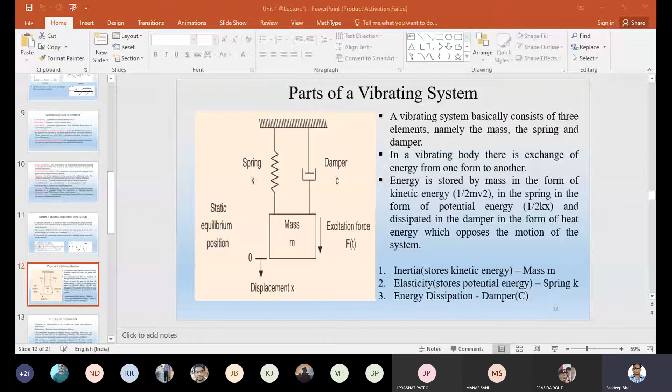Now coming to the next slide, we have effect of vibration. So due to vibrations, what are the different effects or different causes due to vibrations? You can see this vibrations.

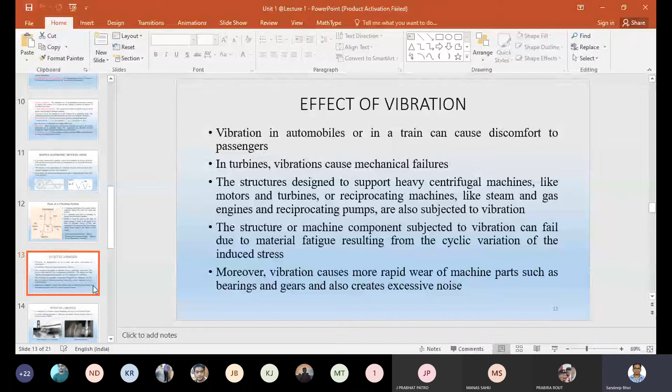First of all, you will see the vibration in automobiles or in a train can cause discomfort to passengers. Most of you have gone through train travel and seen jerking many times; also if you have gone through the bus, many times jerking will be there. That jerking is due to these vibrations, so once you feel the jerk, you get this type of oscillation. Once oscillations will be there, you will have certain vibrations, and you can feel that vibration while traveling in automobiles.

Also, if you see in turbines or heavy machinery, vibration causes mechanical failure. As I have already discussed, in heavy machinery once vibrations arise, many problems will arise. That may be due to loosening of mechanical components or parts. Once the parts, nuts, bolts and all these things get loose, these vibrations will cause further issues.

Once vibration occurs in this kind of heavy machinery, there will be many mechanical failures, and due to this failure lots of losses will be there, which will be very difficult to bear. So we will try to avoid all these vibrations or losses due to vibrations, right?

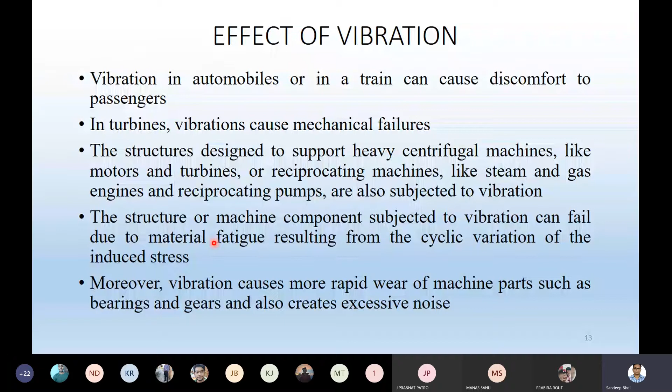As another practical example of how vibration effects occur: suppose this bridge has been designed according to certain criteria, but it fails. It fails somewhere here because it has achieved some external excitation.

That external excitation will be equal to the natural frequency of the vibrating body — as I have told you, once resonance arises, resonance means the external force of excitation becomes equal to the natural frequency. This bridge initially has some natural frequency, and once it achieves that external excitation equal to its natural frequency, resonance arises, and once resonance arises, this bridge will get failed.

That is what we always try to avoid — resonance. So for what purpose are we calculating the natural frequency? It means the natural frequency is the ultimate point beyond which no external frequency should exceed. That external frequency should not achieve the natural frequency of a body. Once it achieves, or becomes equal to or greater than the natural frequency of the body, then this kind of failure will happen.

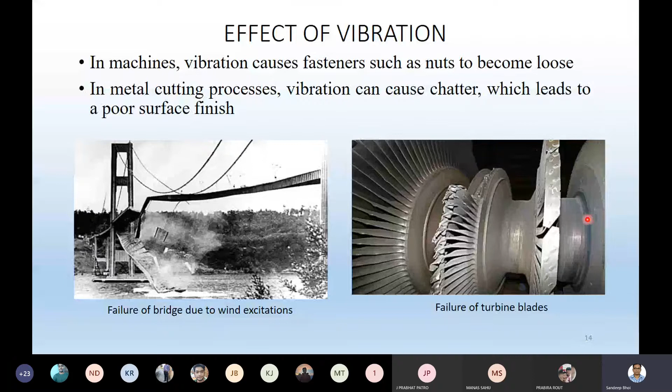Now let us see why to study vibration. As you have already seen, you must always remember, vibration is always an undesirable condition in a mechanical system. We don't want vibration in any kind of system. Just remember, vibration is always undesirable in any mechanical system.

Whenever the natural frequency of vibration of a machine or structure coincides with the frequency of external excitation, resonance occurs, leading to excessive deflection and failures. That is what I always told you. Once resonance arises, excessive deflections will be there, and due to these excessive deflections, failure arises, so we must remove the causes of vibration at the design stage.

So at the design stage, as design engineers, while we are designing these vibrating parts and components, we'll have to remove the different causes of vibration, so that it will be a good design.

For an existing machine or structure, we reduce the effect of vibration by designing proper vibration mitigation strategies such as viscous damper, tuned mass damper, etc. We'll see these things after these slides, what exactly happens in the mechanical system with dampers.

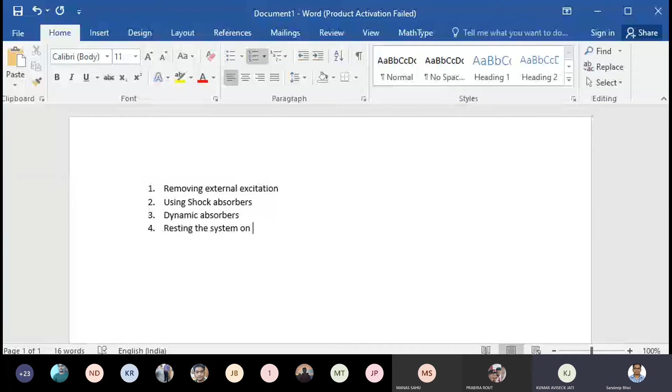First one will be removing external excitation. Second one using shock absorber. Third one using dynamic absorber. Fourth one, we will be resting the system on a proper vibration isolator.

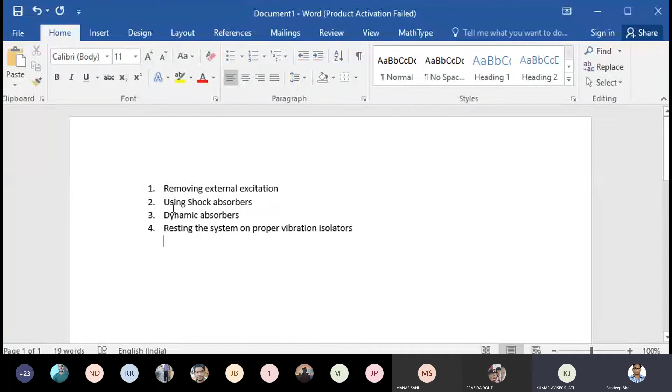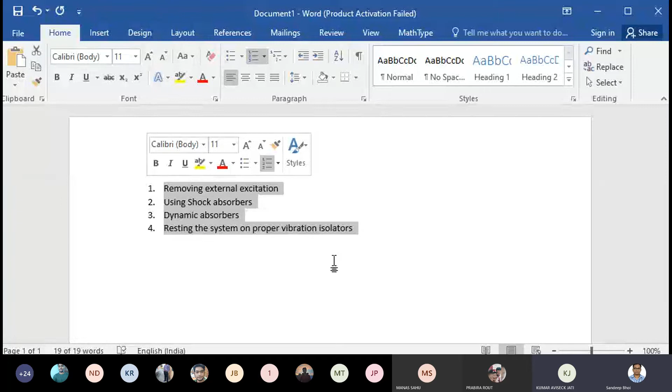So these are the few ways how you can avoid your vibration, or how you can eliminate or reduce the vibration up to a certain extent. So how you can eliminate it or reduce it? First one, either removing external excitation.

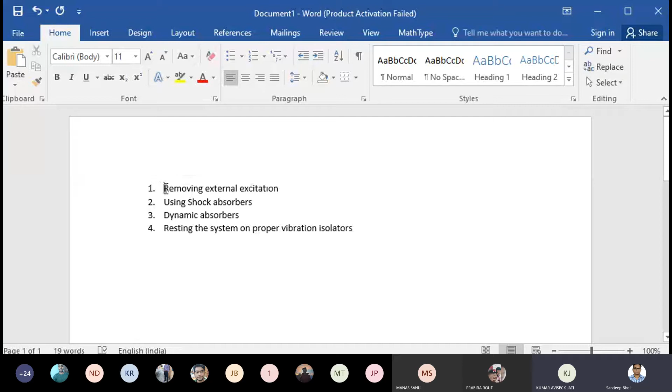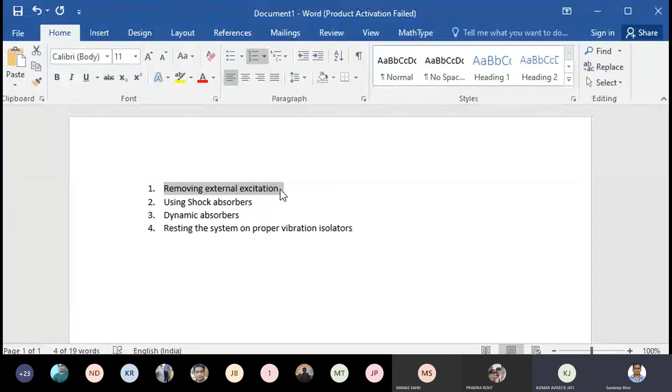I will let you know what is external excitation. External excitation means suppose some external force is applying, and due to that vibrations will arise. So once we remove that external force or external excitation, then your vibration may reduce up to a certain extent. So that is one way of reducing your vibration, by removing external excitation.

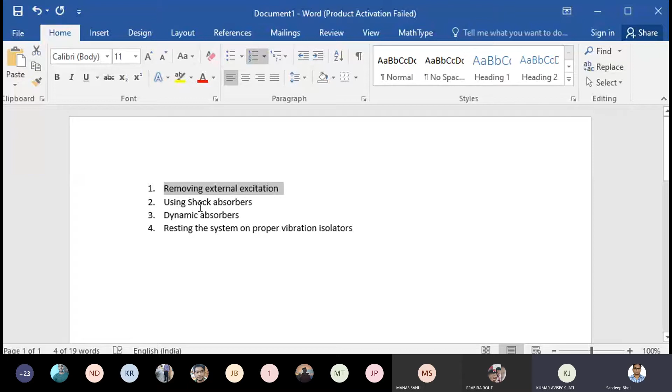Second one will be using shock absorber. In the last class I told you the example of a bike. You have a shock absorber in your bike, right? So using a shock absorber also, you can imagine if your shock absorber is not there and you are passing through a hump, what happens, how do you feel? If in your bike the shock absorber is not there, you can imagine, and that way you can understand the importance of the shock absorber in the role of avoiding vibration.

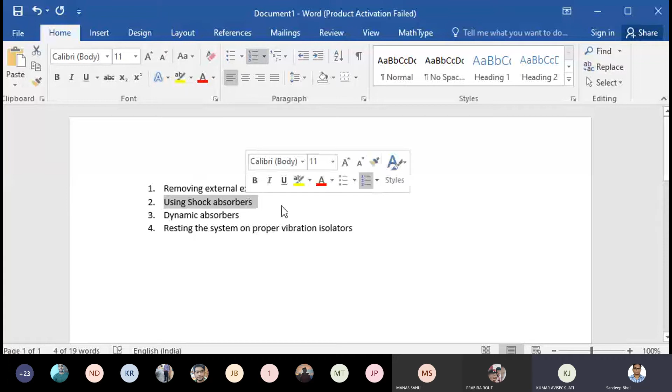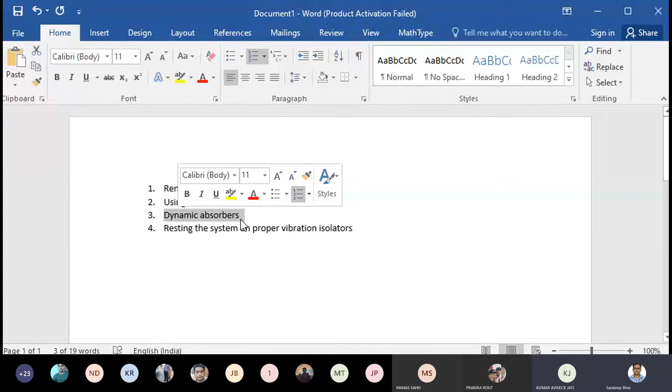In case of dynamic absorber, it is also one kind of damper kind of thing. It can absorb the vibrations, so that the vibrations can be eliminated up to a certain extent.

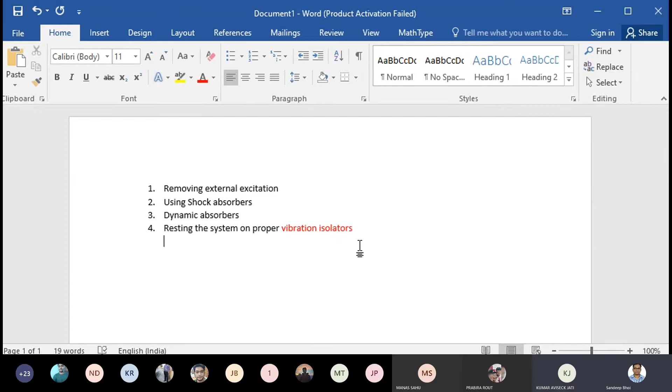Another one will be resting the system on a proper vibration isolator. What does this mean? Vibration isolator means what? I think most of you have seen the UTM machine in your workshop, right? That UTM machine is placed. Can you imagine that UTM machine is placed above a certain concrete foundation? That foundation is called your vibration isolator.

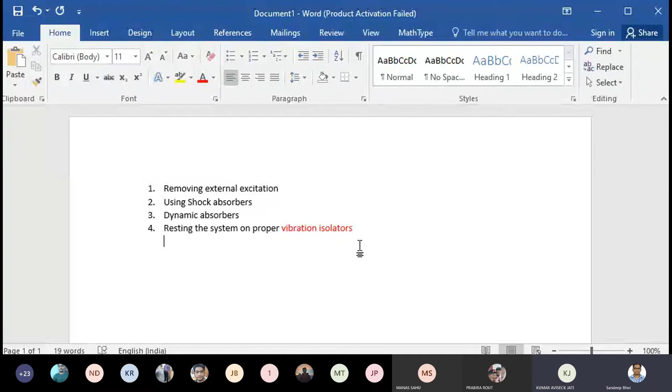So you can imagine, when the machine operates at a certain RPM, that RPM will transmit to the ground. That RPM means vibration. Due to that RPM, when the machine is running, the vibrations will be there in that machine, and through that machine, those vibrations will be directly transmitted to the ground, and the ground will break if we do not provide that foundation. So in order to avoid the direct transmission of vibrations from the machinery to the ground, we are giving some vibration isolator, in the form of concrete or some foundation.

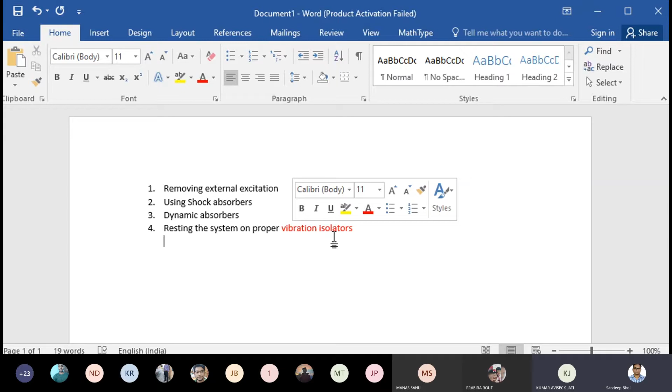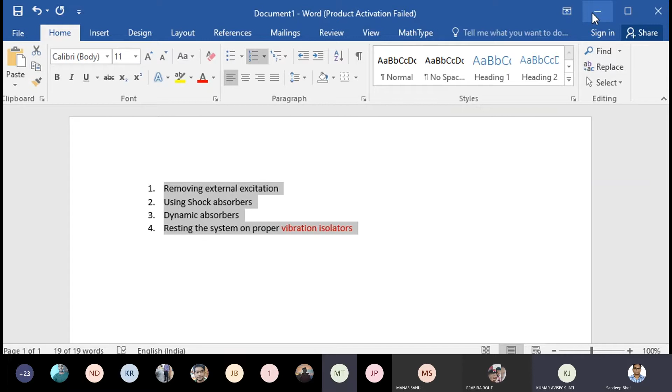So these are the different ways of removing or eliminating the vibrations up to a certain extent. So now we'll see, sir, what is dynamic absorber?

Dynamic absorber, you can imagine, for example, when you are operating the lathe machine. You have seen that the job will be fixed to one side, and you are rotating, at the tail side some rotating device is there, and at the head side your job is fixed. So while you are rotating that machine with a certain RPM, that rotation or deflection should be constant, or else it will vibrate at a very high frequency, and those vibrations you cannot control. So for controlling high speed rotating machinery, you will have to use some dynamic absorber so that it will absorb the vibrations.

Are you getting this or not? Absorber means it will absorb all the rotational movement and all these things.

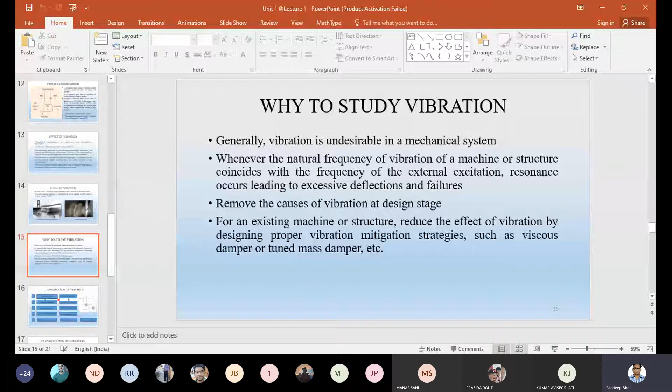I'll just show you, let me tell you one thing, just a minute.

Suppose this is what your lathe machine is all about. One part is here and another part, the tail part, is here, and some chuck is here, and you are giving some tool. Tool is here. So this will obviously rotate with high speed. Once it rotates, because it is connected with some motor, that motor will supply power here and it will rotate. This chuck will rotate. This part is fixed, and this will rotate. It will rotate, and due to that rotation, this may get some vibration. So in order to avoid these vibrations, we need some dynamic absorber, so that it will absorb its deflections. It will not deflect, and it will be in constant rotation.

Hello, your voice is very slow. Now it is okay. Yes sir, actually due to network problem it was slow.

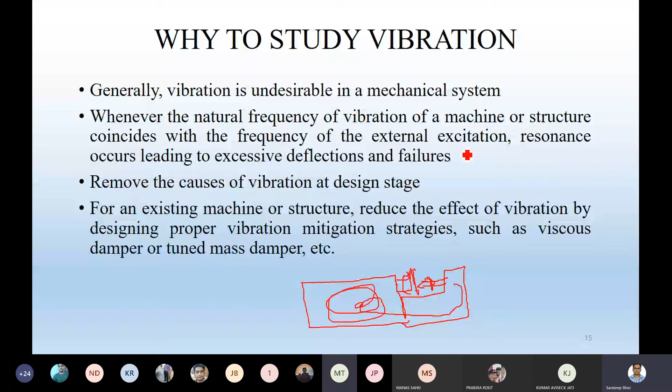Then you can categorize damped vibration, undamped vibrations, linear vibrations, non-linear vibrations, deterministic vibration, random vibrations, longitudinal vibration, transverse vibration, and torsional vibration.

Many times in your external examinations, it will be asked to differentiate between free vibration and forced vibration, or what is damped vibration, what is undamped vibration, what is linear vibration, what is non-linear vibration, or differentiate between deterministic and random vibrations, or what is the difference between longitudinal, transverse, and torsional vibration. So these are varieties of classification of vibrations.

You can see one by one. For free vibrations, if you see, what does it mean? Just see. Suppose consider this part, one having a spring and one mass is attached here.

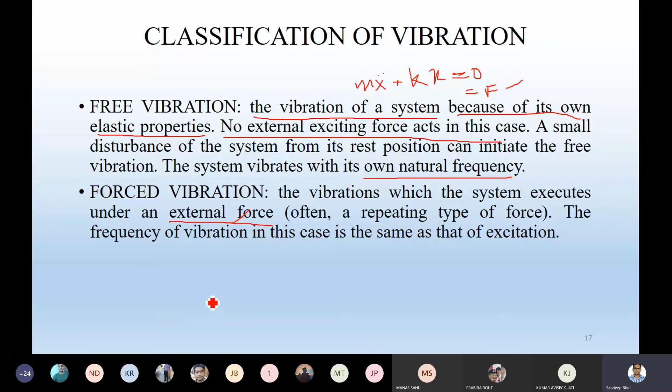The free vibration and forced vibration. Now we'll see damped vibrations, and undamped vibrations. Damped means what? As I have already told you, damped means when a damper is used in the system. Suppose consider a damper is used in the system.

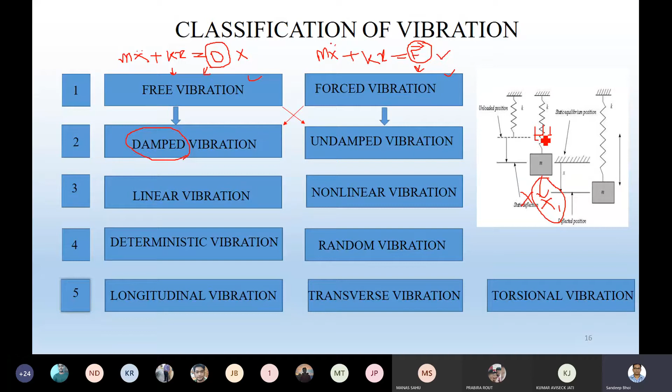The spring is used here and one damper is used. Suppose if I draw this diagram, consider this is the spring and one damper is used here, and your mass will be attached here. One spring constant K, damper C, and mass is used. Once your damper is used, then that is called damped vibrations. Once there is no damper, there will be undamped vibrations, right?

So this free vibration can be a damped vibration. If a damper is used and you are using no external force, then that kind of vibration is called free damped vibrations. If damper is used and no external force is used, only this body vibrates with its own natural frequency, then this is called free damped vibrations.

Once in these systems your external force is used, then that system is called forced damped vibration, right? If there is no damper, then that is called free undamped vibrations, right? So after this chapter, we are going to see undamped free vibrations.

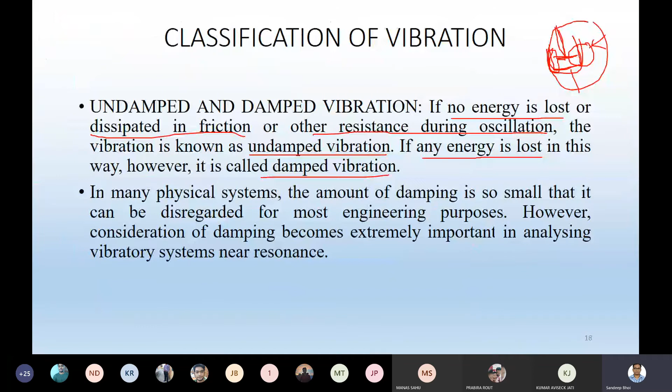The differential equation that governs the behavior of linear and non-linear vibratory systems are linear and non-linear respectively. You can imagine how these linear systems can be imagined. You can also add these linear systems, because you can superimpose these linear vibration systems. For example, I can write two different linear vibration systems.

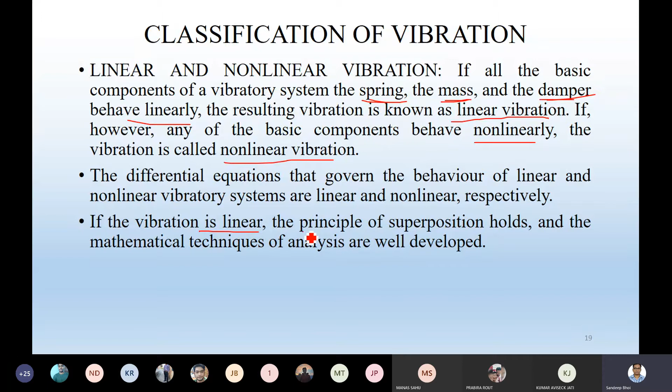Suppose I give one example of a linear vibration system: m x double dot plus c x dot plus k x will be equal to, considering a forced vibration system, f1 of t. In the other case, m x double dot plus c x dot plus k x will be equal to f2 of t. So these are two different linear vibration systems.

In this case, if we apply some external force, all our vibrating components will behave linearly, which is why it is called a linear vibrating system. Since we have two linear vibration systems, we can apply the principle of superposition. The resulting equation will be m x double dot plus c x dot plus k x equal to f1(t) plus f2(t), directly adding these two equations.

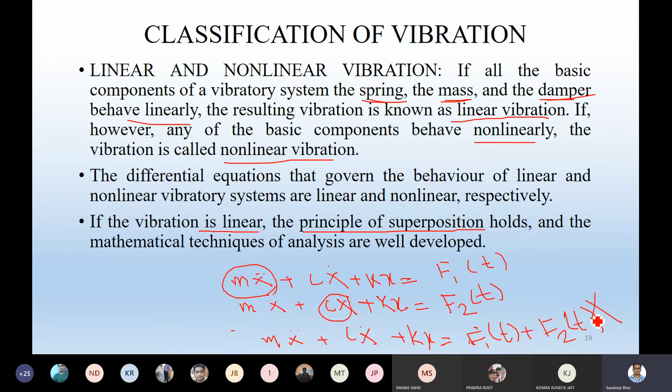Now what is the next one? Deterministic and random vibrations. This is nothing but: if in any vibrating system the amount of external excitation is known in magnitude—suppose we know the value of this external excitation, x1, and we know exactly what this value of x1 is—

then that is called deterministic vibration. If we don't know this value of external excitation, then that is called non-deterministic, or you can call it random vibration. So deterministic vibration is when, in the vibratory system, the amount of external excitation is known in magnitude, and that causes deterministic vibration.

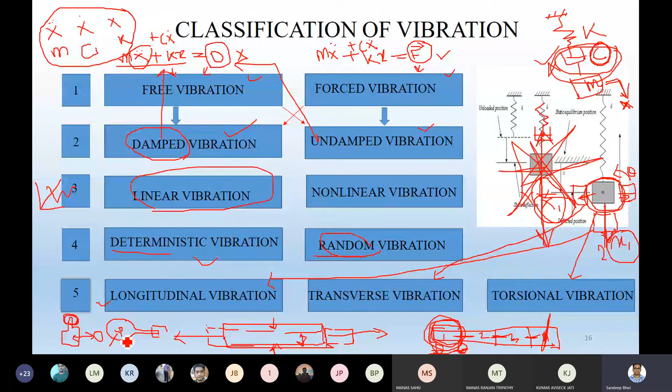Those playing with tennis or a hard cork ball can feel the jerk. Also if you are playing with a racket, those playing tennis or badminton, once the ball hits here, if you are holding here, you can feel the jerk here, because the ball is moving in this direction, but you feel the jerk in this direction. Have you observed these things practically?

Try to understand and correlate each and everything so that you cannot forget these things. That is why I try to explain it this way. So those who have played badminton or tennis can see this.

You hit the cork or ball in this direction, but you feel a jerk in this direction in your hand. Why? The kinetic energy is transmitting due to this collision of the ball and the racket; kinetic energy transmits from this part to this part, even though you hit in this direction. That is called transverse vibration. Are you getting it or not, Manas?

Yes sir, so you are getting transverse vibration. So in case of torsional vibrations, if any rotating component will be there, or we are giving a motion to this body, but this component will rotate in this direction. Can you give me an example?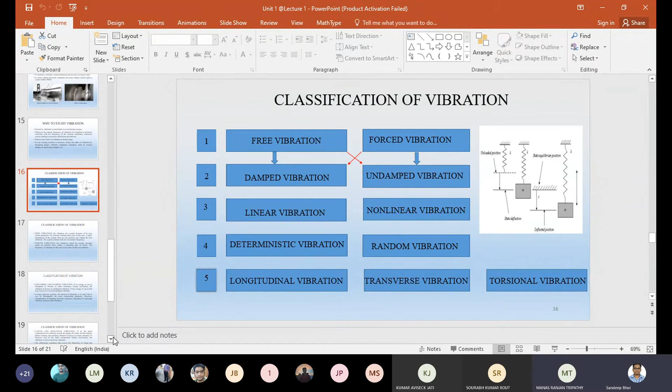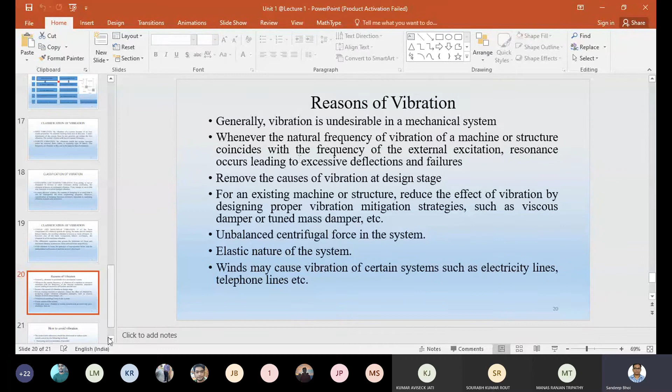Now you can see the different reasons of vibrations, and the different causes of vibrations. This I have already told you about. The causes of vibration, and I think I have also told you how to avoid this vibration: removing external excitations if possible, using a shock absorber, using a dynamic absorber, and resting the system on a proper vibration isolator. So these are the things we have already discussed.

So I think we have taken more than 1 hour. So let us stop, and next class we can discuss a few more things on this chapter.

So how this vibration analysis can be done. So I hope till now we have discussed the history of vibrations, the introduction to vibrations, what is the importance of vibrations, what are the different reasons of vibrations, different classifications of vibrations, how to avoid vibrations, and what are the different parts of vibrations. All these basic things we have almost discussed within these 2 classes.

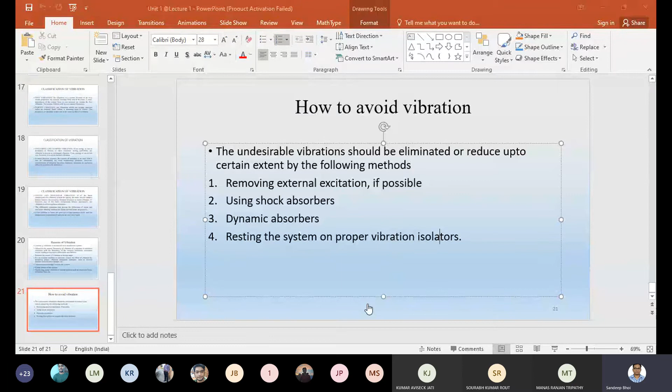We have discussed. From next class onwards, we will try to derive the equations, because as I have told you, vibration is mostly... Just, before winding off the session, let me give you a few things about how actually this vibration is working.

Throughout vibrations we are only, keep it in your mind, moving with these 4 different points: 1, 2, 3 and 4. Sourabh Kumar Rout, what is going on? Yes, sir. Keep yourself mute. So see, throughout your vibration we are only dealing with these 4 things.

So what are the 4 things? First, as I have already told you, in mechanical vibration we are converting the physical system into a mathematical form. So the first step is mathematical modeling of any physical system. This vibration is all about mathematical things. So complete vibration deals only with problems.